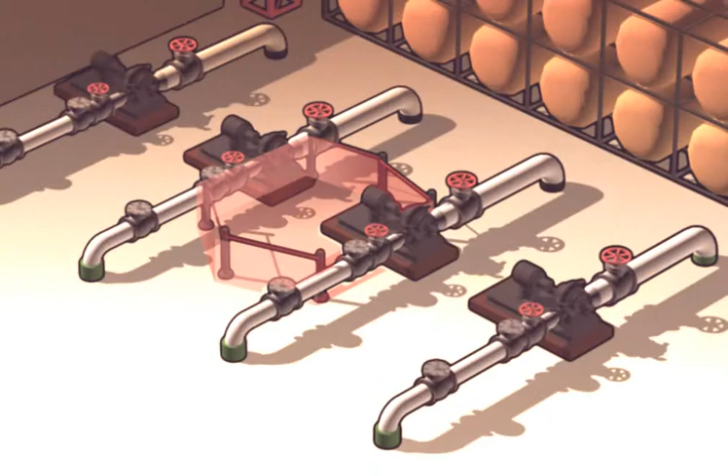What is the purpose of access control? The purpose of access control is to prevent traffic in an area where personnel may be subjected to hazardous situations. This means that no unauthorized personnel shall be within restricted areas.

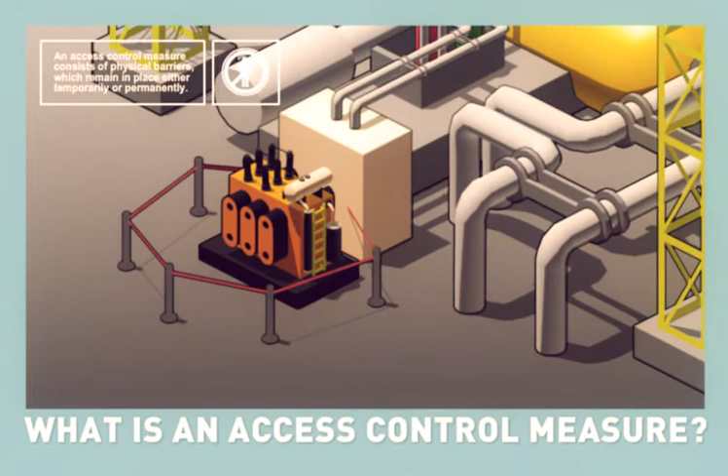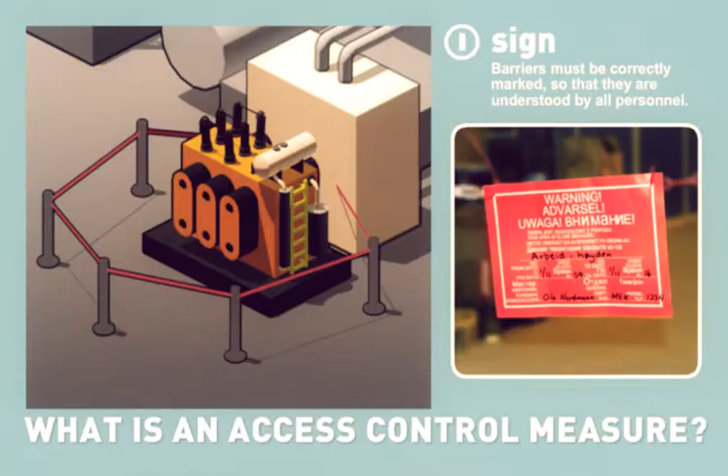An access control measure consists of physical barriers, which remain in place either temporarily or permanently. The barriers must be correctly marked, so that they are understood by all personnel. There are various types of access control equipment, which are suitable for different work tasks.

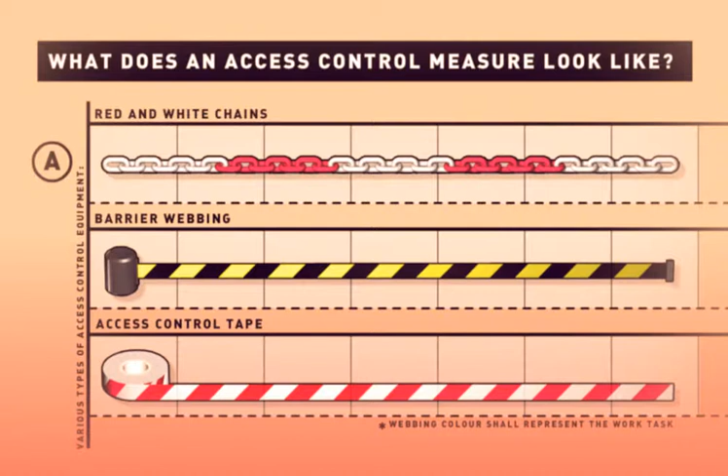Temporary access control measures often consist of red and white chains, barrier webbing or similar. An access control measure can also be an integrated part of the area design, such as a red and white self-closing gate. Access control measures do not implement and remove themselves.

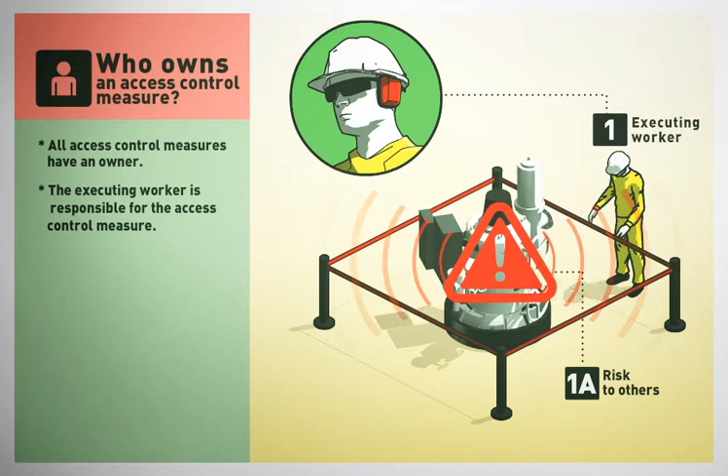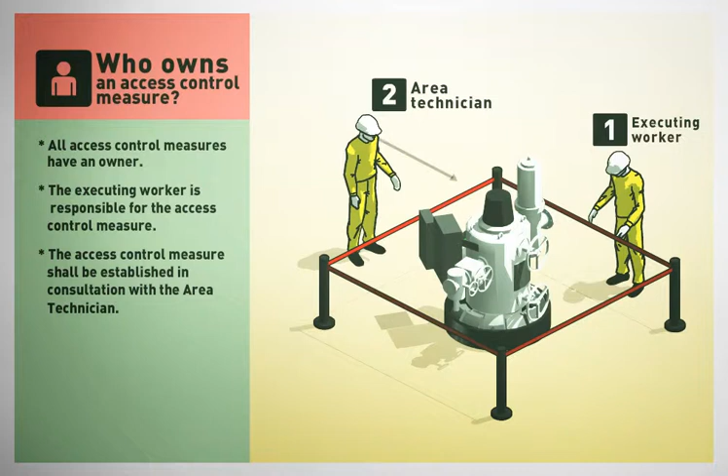All access control measures have an owner. The executing worker is responsible for establishing access control. This means if you shall carry out work that involves risk to others, you are responsible for establishing a restricted area. This shall be done in consultation with the area technician or area responsible, who shall approve the access control measure. The executing worker is also responsible for maintenance of the access control measure.

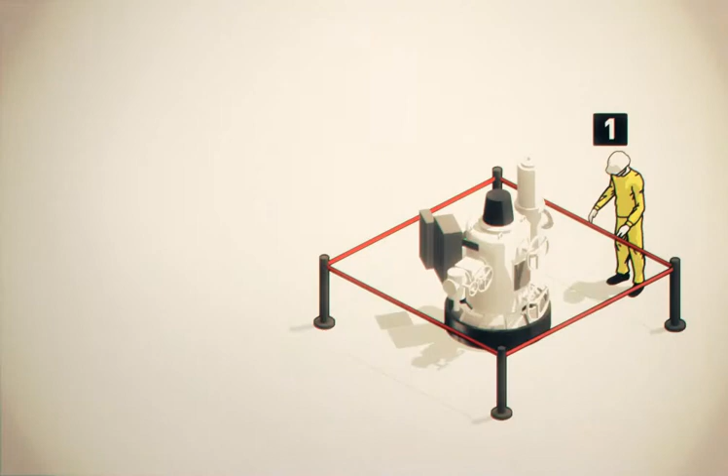Don't forget to remove the access control measure as soon as the area is cleared for normal traffic. So that it is clear who owns an access control measure, the restricted area must be marked.

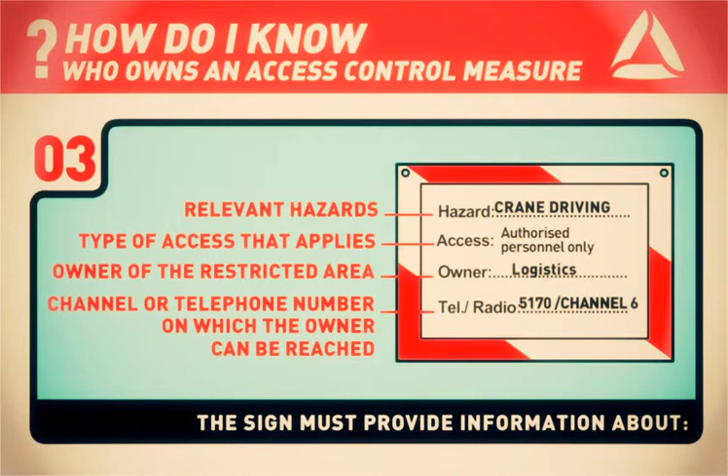The sign must be clear and provide information about relevant hazards, the type of access that applies - no access or authorized personnel only - the owner of the restricted area, and the channel or telephone number on which the owner can be reached. The sign may also provide information such as references to any relevant work permit, and the time at which the access control measure was established.

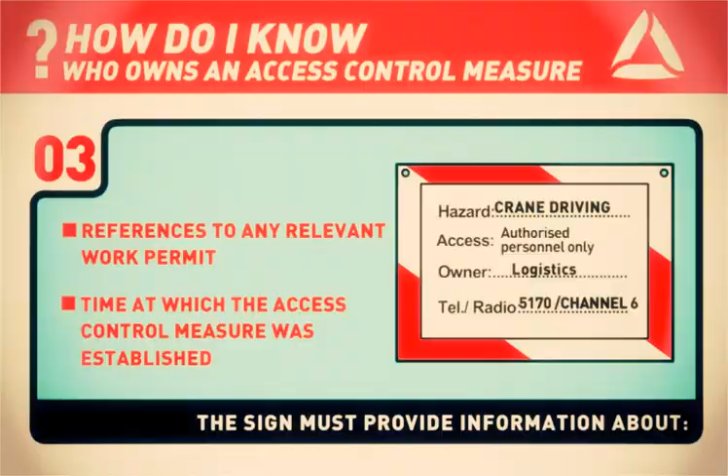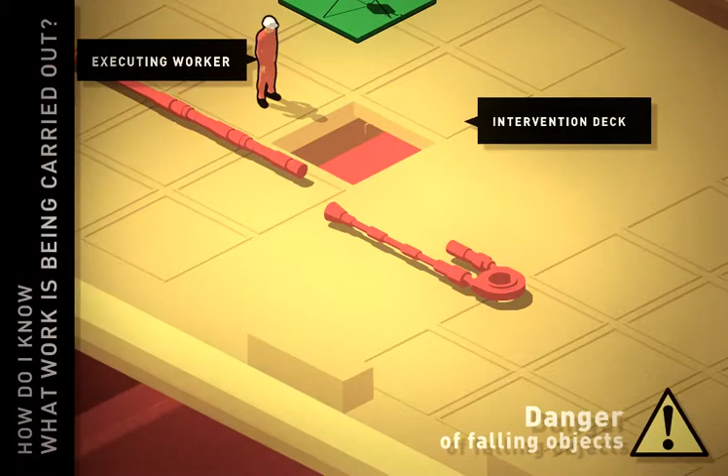Access control measures must be respected, even if you do not see work being carried out. Not all hazards are equally visible from all levels, for example the danger of falling objects.

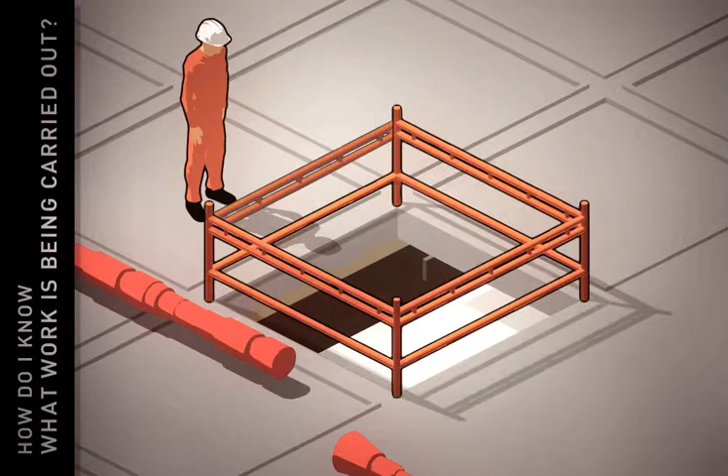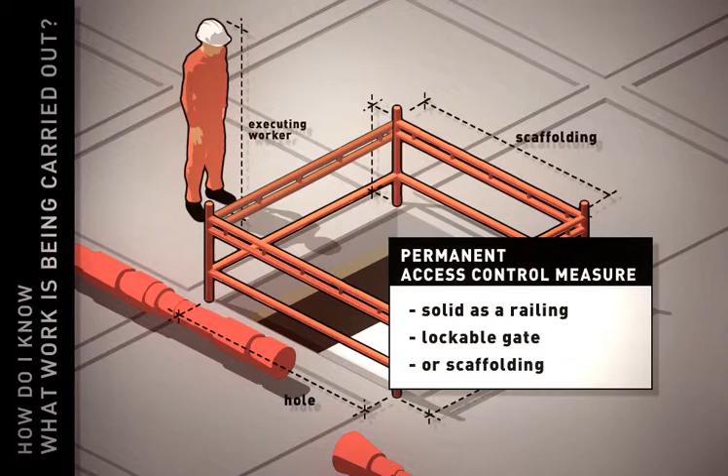Holes or openings that present a risk of personnel falling to a lower level shall be physically secured to prevent danger to personnel. These access control measures should be as solid as a railing. For example, this might be a lockable gate or an access control measure installed using scaffolding materials.

The access control measure must be marked with red and white access control webbing or tape. This should be wrapped around the railing. The presence of security personnel cannot replace access control measures that are designed to physically prevent falls.

If the access control measure is a physical obstacle in an escape route, the alternative escape route must be described and clearly marked. Some types of work require special access control measures.

If you are carrying out work on an electrical installation, the area must be cordoned off using red webbing and a round yellow and black sign showing zigzag lightning. For work involving radiography, the area must be cordoned off using access control webbing and a sign that shows a black radiation symbol on a yellow background.

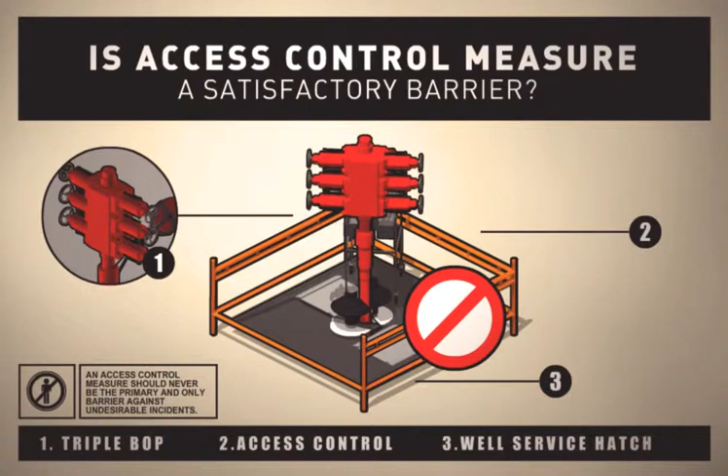An access control measure should never be the primary and only barrier against undesirable incidents. An area is cordoned off to reduce the consequences of an undesirable incident occurring as a result of the activities being carried out in the area.

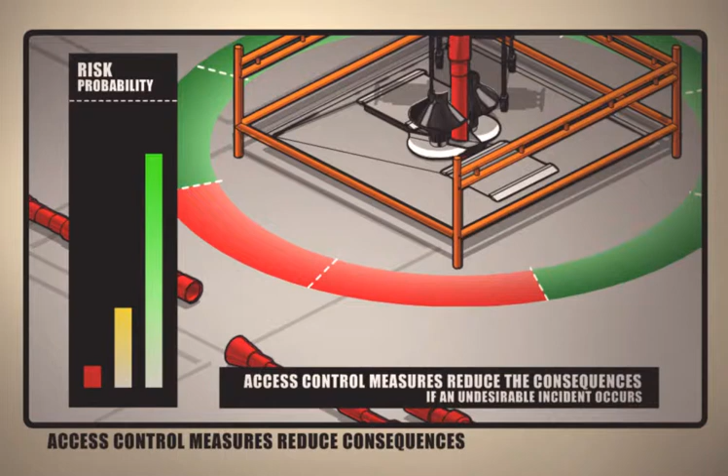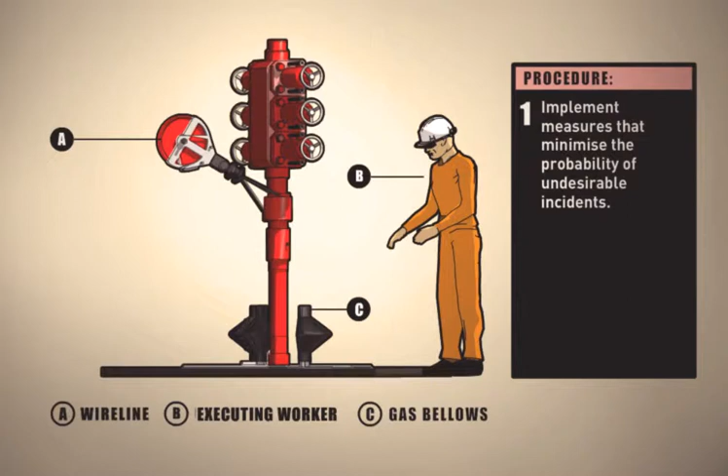You should therefore implement measures that minimize the likelihood of undesirable incidents occurring before you establish access control. You then implement the access control measure that will reduce the consequences if anything goes wrong.

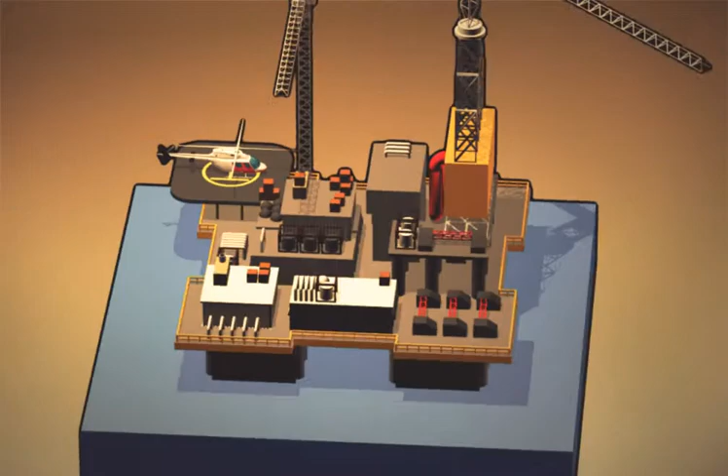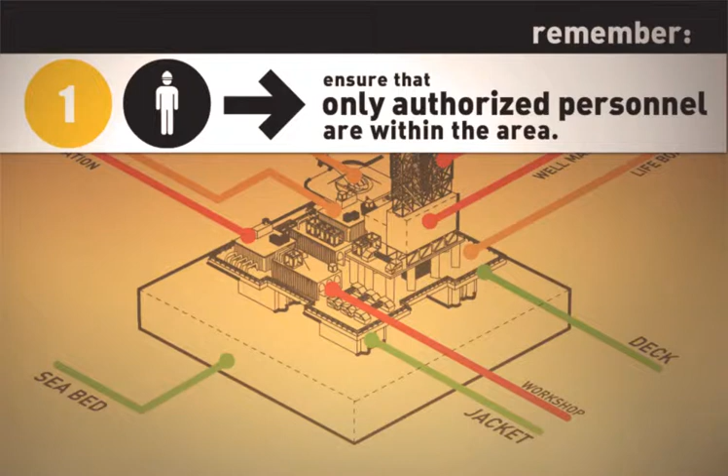Before starting the work, you must ensure that only authorized personnel are within the area. Remember to remove the access control measure when the work is completed. If the restricted area is not yours, there is only one thing that you should do: keep out.